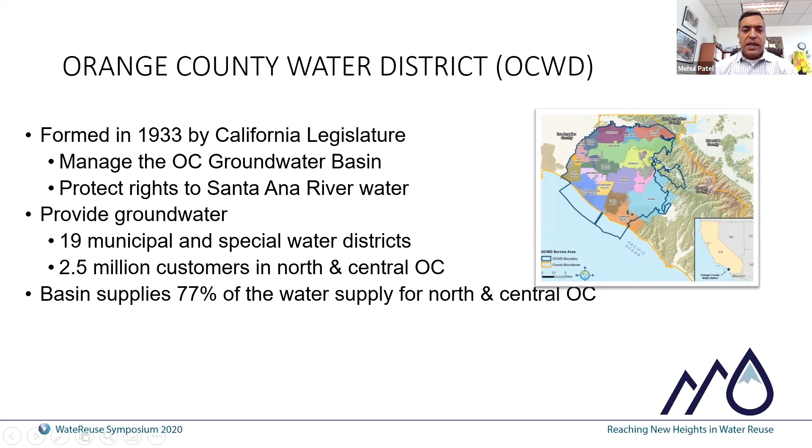So the project that we formed to help address the issue of water sustainability in our groundwater basin was the groundwater replenishment system. Some of you may already be familiar with it, but here's a few facts about our system. It's currently designed to produce 100 million gallons per day of product water. The goal is to purify sewer water, or what's better known as secondary effluent, that's produced by another agency, Orange County Sanitation District.

We use that water to sustain and help replenish the groundwater basin, as well as protect it from seawater intrusion. That's done by taking secondary effluent and putting it through an advanced water purification process that leads to a water quality that's beyond drinking water quality, with the goal of meeting or exceeding drinking water quality standards, both for the state of California and federal standards. At the current 100 million gallon per day capacity, that's enough production to produce 103,000 acre feet a year.

With the water usage rates in our service area, that's enough water for about 850,000 people. When we went into the early planning for this project, we had hoped that if the need arose, we would have the ability to expand the facility's production capability depending upon water usage rates and drought conditions in our service area. So the original project went online in January 2008 at 70 million gallons per day.

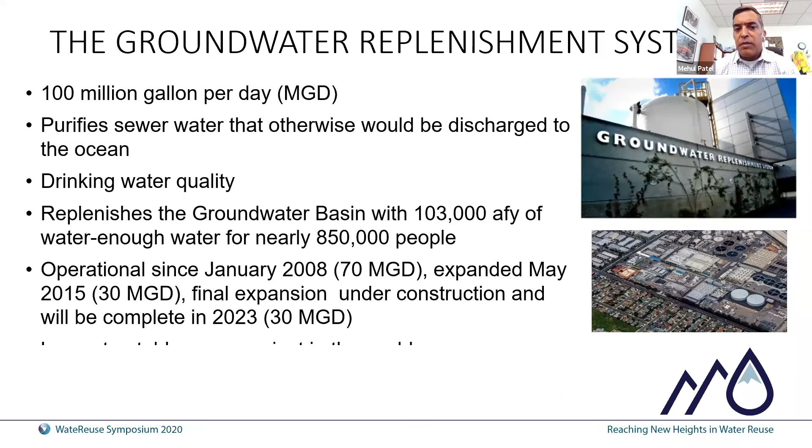At the current 100 million gallons per day, it's the largest indirect potable reuse facility of its kind. In getting to that current status, there were a lot of obstacles and considerations that got us to where we are today, and that'll be the focus of the remainder of my presentation.

One of the things we had to do before we considered even embarking on a project like the groundwater replenishment system was evaluate where our current sources of water were coming from. These are sources that we would consider for use in replenishing our groundwater aquifer, which, as I mentioned before, is our job to maintain so that 2.5 million people can get the majority of their drinking water from it. So we thought about conservation, which we still preach and practice today, but that's essential—it wouldn't be enough to cover what we foresaw for future water needs in our service area.

Of course, we've always used imported water as a portion of the sources for replenishing the aquifer. Typically, we use untreated Colorado River water or state project water through the Metropolitan Water District. But those sources are also subject to drought conditions where they're not available or less available in certain years, and their cost goes up with drought conditions and other issues. So they can't be relied upon as the sole means to meet some of these additional water needs.

We've also thought about seawater desalination, but that's very costly given the salt concentrations and energy requirements. And as many people know in California, environmental permitting for seawater desalination facilities is very difficult. So that's what led us to recycled water being the best choice, and I'll give you some context on why that is.

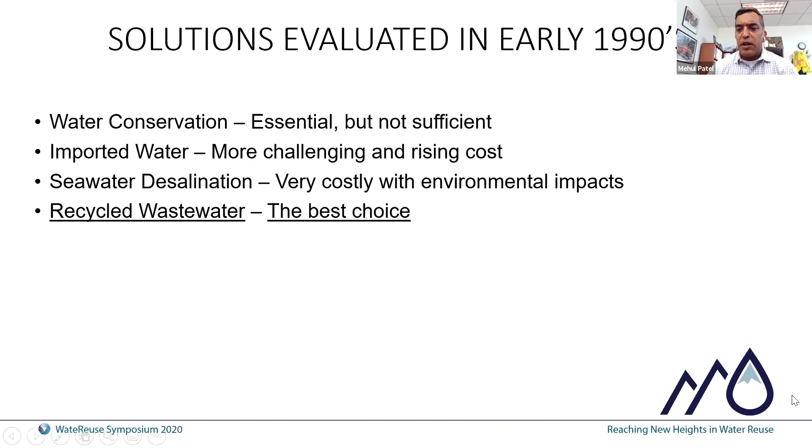As we talked about the different water supplies we evaluated, we thought about whether we could also look into full service imported water—taking water that's fully treated and trying to augment the groundwater supplies that way, or having that water available to some of our producers who use our groundwater. Seawater desalination was also considered, but quickly ruled out.

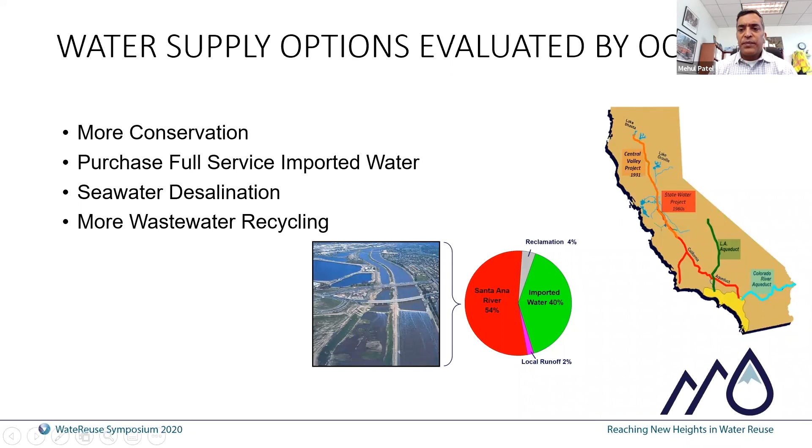So once we settled upon recycled water being the choice for us, we had to look at how we could implement a project using recycled water. We had our old Water Factory 21, which some may be familiar with. This was originally a 15 million gallon per day facility that used an advanced treatment process with high lime clarification, granular activated carbon, and reverse osmosis for salinity control. It operated from 1975 and operated for over 30 years.

We knew that technology was improving upon what was used in Water Factory 21. We knew, based upon pilot testing, that we could produce water comparable to imported water, which was our goal if we recycled secondary effluent. We knew secondary effluent was locally controlled - we have control over it, and no one else is going to take it with our partnership with the sanitation district. It was always available; there's always wastewater being produced. And we knew we could produce high quality water by insisting on the highest level of treatment. Partnering with OCSD helped make the economics and the feasibility of the project successful.

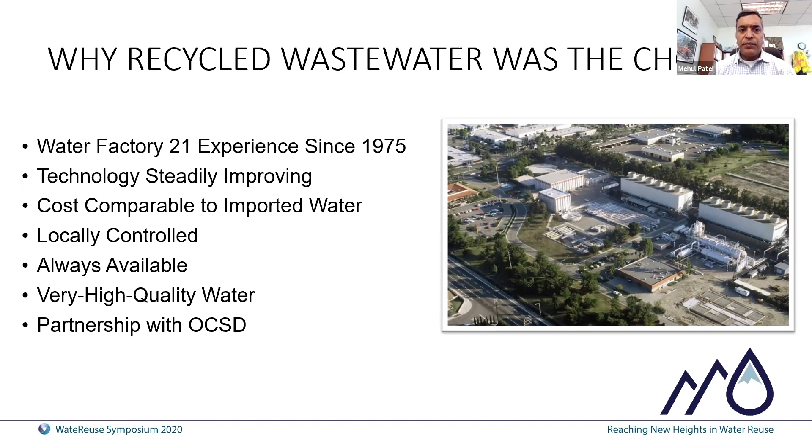So the considerations that went into what is now the groundwater replenishment system, and have allowed us to have the success we've had, is that we knew we had Water Factory 21, and we knew that at 15 million gallons per day, it was there just to feed our seawater intrusion barrier and needed to be expanded. We also knew that OCSD was having issues with peak storm flow relief, where they get inundated with storm flows in their collection system, and didn't have enough capacity in their ocean outfall and didn't want to pursue construction of a second outfall.

So they had money they could invest in our project, and we wanted to make sure that our project could be comparable with imported water. Then we wanted to figure out how it could be funded, and ultimately we used a combination of state and federal grants and state revolving fund or state low interest loans that made it feasible for us to pay for the capital of the project.

We knew that we could possibly overcome the regulatory uncertainty, because there weren't any recycled water or indirect potable reuse formal guidelines or regulations in place when we started the project and the planning for it. But we had the success of Water Factory 21 to rely upon and make suggestions to the regulators on what type of components would need to be in the project and what kind of water quality we'd need to meet.

We did extensive pilot and demonstration testing, which made us confident that we could come up with a treatment process - microfiltration, reverse osmosis, ultraviolet light with hydrogen peroxide, or advanced oxidation - to produce the highest quality water.

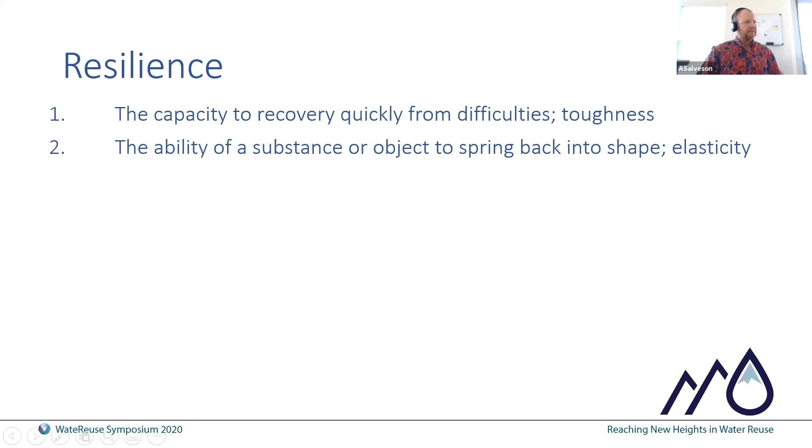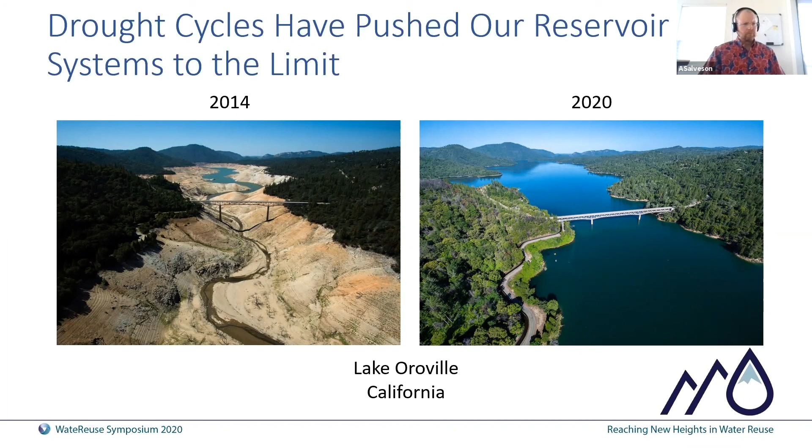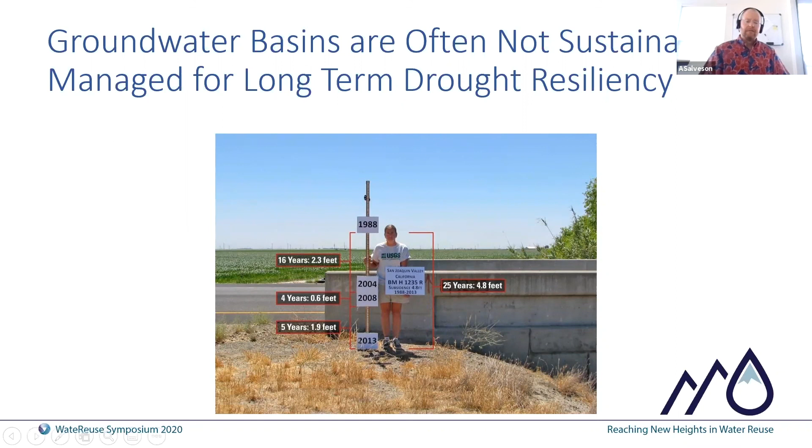So we now have the science to know how bad these droughts are. We can look at tree rings going back to the time of Charlemagne and the Viking raids on Europe, and the drought cycle we're in now is one of the 5 worst. It appears to maybe even be the 2nd worst in that 1,200-year period. And these droughts will come back, and as we see with climate change, challenges appear to be accelerating.

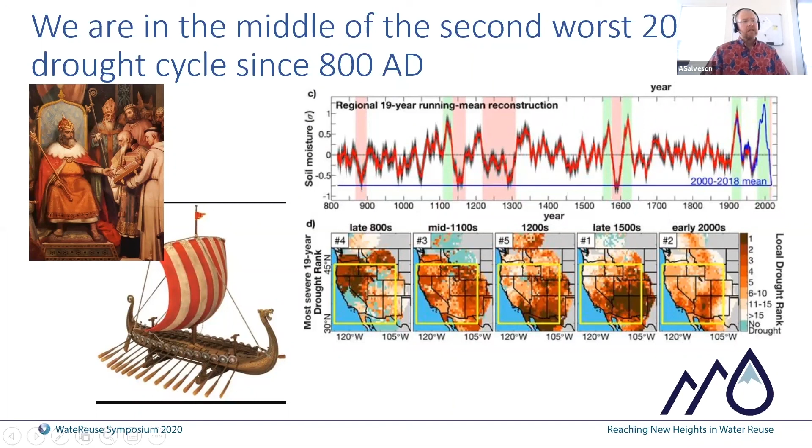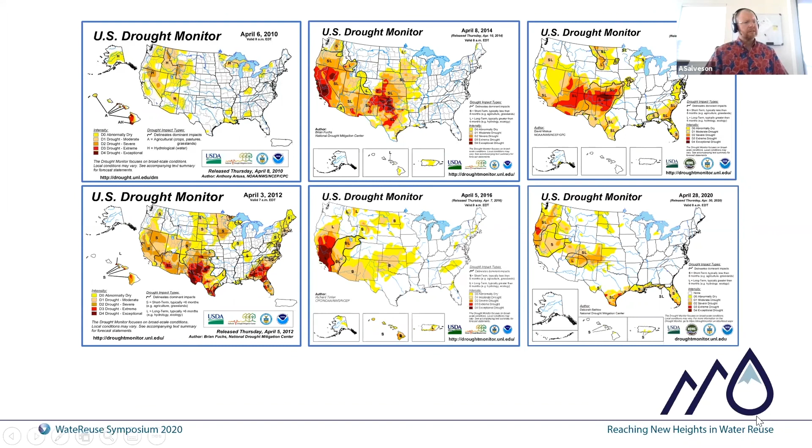We've heard this several times before in different presentations through the years at Water Reuse, and it's true: when the well is dry, we know the worth of water. But we understand the magnitude and impact of our drought cycles now. We've got data like I showed before, and a lot more of it. We now know that our water supply must function independent of Mother Nature. We can't rely upon a uniform yearly recharge of our groundwater basins or our reservoir systems.

It's not quite as famous a quote, but it really applies: a stitch in time saves 9. Again, what do we do now to prepare ourselves robustly for later?

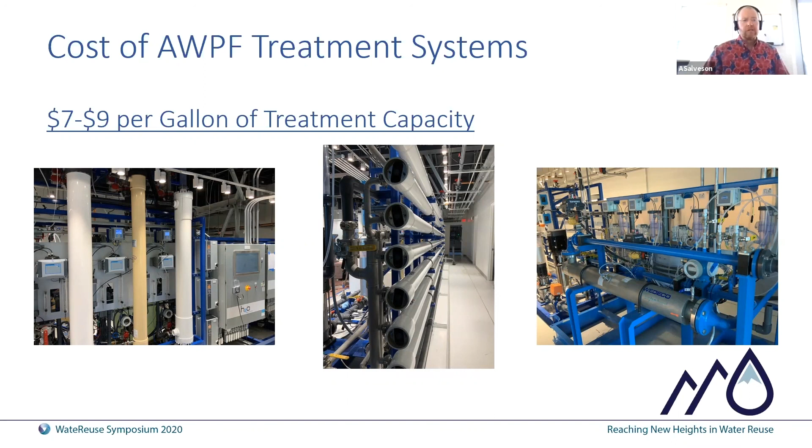Recognizing that advanced treatment is expensive, when we're talking about membrane-based, RO-based treatment as an example, building large systems that just sit idle and wait for the drought is costly — $7 to $9 per gallon. So a 10 million gallon a day facility could run you $70 to $90 million just for the treatment. There are other non-RO treatment processes, which will be discussed, that can save some costs, but it is still very expensive. So how much treatment system do you build? How much infrastructure do you build now that you don't necessarily need today?

I want to spend a few minutes on this table, so bear with me. We're looking through 4 different projects that have either been completed, are underway on the design side, or are being planned. This is a mixture of, at the top row, conventional raw water projects, direct potable reuse projects, and indirect potable reuse projects — different ways to build that infrastructure ahead of when it's needed.

So I'll go down to the second row, first column on the left. Project number 1 is a conventional raw water project where it takes a new raw water supply and builds a water treatment plant. This project is constructed as a large, very expensive facility, and the goal is an entirely redundant water supply for their community in the event of some catastrophic event. The system's run at 10% — you can't just mothball it entirely — and it provides standby for loss of the primary water supply for a community.

There we go, project number 2. This project has been planned, much like project number 1. It's smaller, so the investment is $75 million, because the community is smaller. All four of these projects are in different states across the Western US.

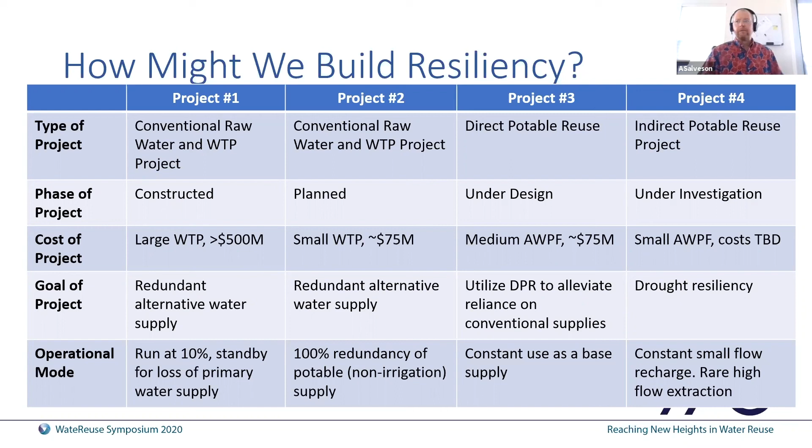This is my last slide. A few closing comments to think about and stimulate discussion: overbuilding capacity is costly, but in some cases may be necessary.

When that's done, it's nice to be able to use that equipment. Direct potable reuse is an example where you provide high capacity treatment and base flow to alleviate demands on conventional supply. Then look for ways to increase storage gradually, when the rain is falling and groundwater basins aren't being taxed too much—fill them up slowly, then allow for high use during extreme drought conditions later. IPR is a way to do this: small flow now, big extraction later.

And I think that wraps it up.

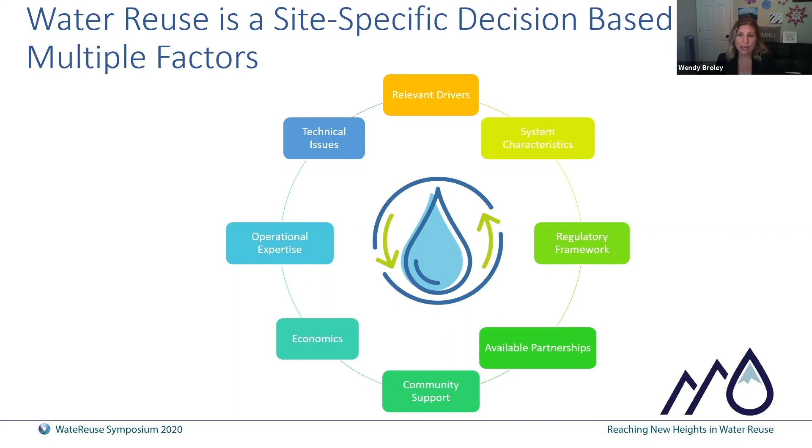So funding and community support, two really important keys to a successful reuse project. Brown and Caldwell is working with a small agency, Soquel Creek Water District, who serves about 40,000 residents. They've got groundwater as a single source of supply in their area, and they've been dealing with seawater intrusion, which has an impact on the water quality of their supply. Now, this is a community that conserves like crazy - they've done an incredible job at water use efficiency and conservation, but they found they need to diversify their supply for greater resilience and supply reliability, and they need to address these seawater intrusion issues, an additional driver of which there are many.

So the project itself is an advanced water purification facility for groundwater recharge, and it's on the order of about $100 million for conveyance and treatment. But for such a small agency with such a small rate base, that's a heavy lift for the community. So part of what's making this project a reality is their ability to bring in about $52 million in grant funding to cover conveyance and the injection wells for groundwater recharge, and then $49 million in low interest WIFIA loans through the EPA. So not only have they been able to fund their project almost entirely and reduce the impact on their community from an affordability standpoint, they've also demonstrated through a study with Stanford a huge economic benefit to the community, which adds to that community support.

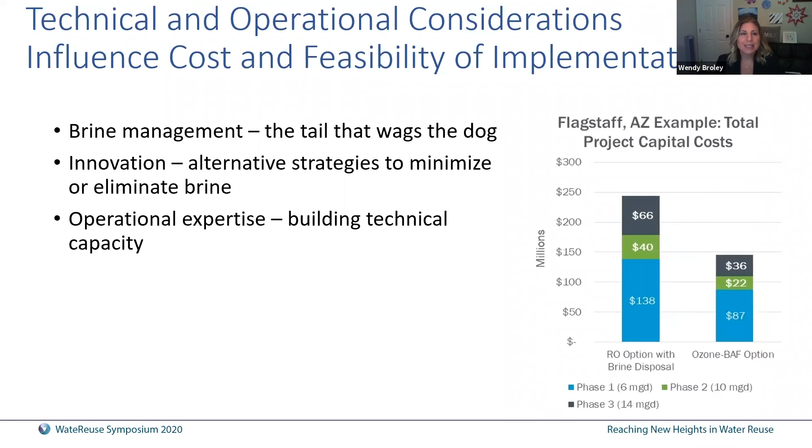If you could go to the next slide, I'd like to end just with a little call to action.

I think when it comes to moving water reuse projects forward, I encourage everyone, all the agencies or private companies looking at this, to collaborate with willing partners. Reuse isn't often something you can do as a single agency or company.

Evaluate cost-effective treatment strategies, innovate to do more with less or achieve what traditional technologies can't, and regulate. We encourage regulation of potable reuse, whether advanced direct potable reuse like in California and elsewhere, or even if you're in a state where potable reuse isn't codified yet, we recommend encouraging that too. We also want to push for more carbon-based strategies to enable more flexible reuse options moving forward.

Hand it back to you, Patrick.

Excellent, thanks Wendy, that was fantastic. I have a couple follow-up questions for you, but we'll save that for the end. Just a point to the audience - the joy of a virtual session. Just a reminder, this is a recorded session, and we certainly look forward to doing this live again in the future.

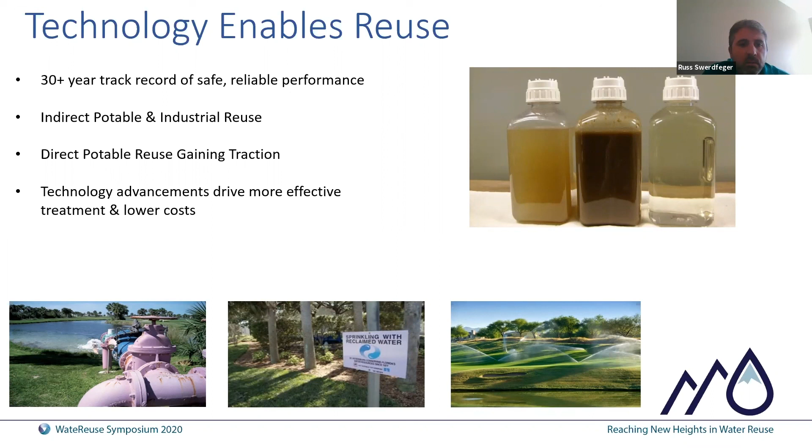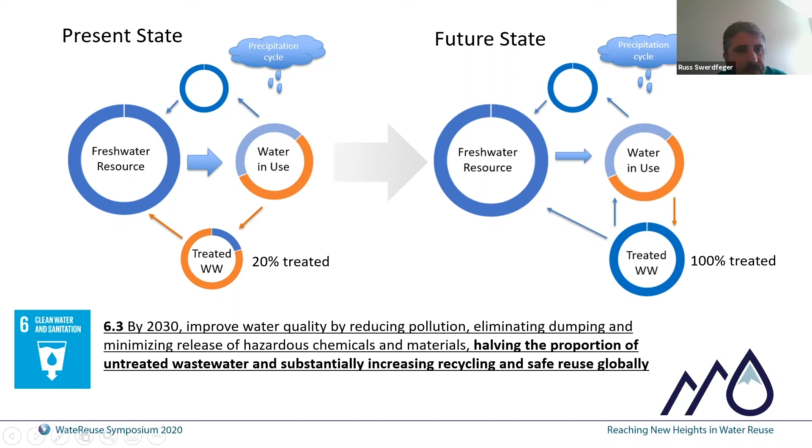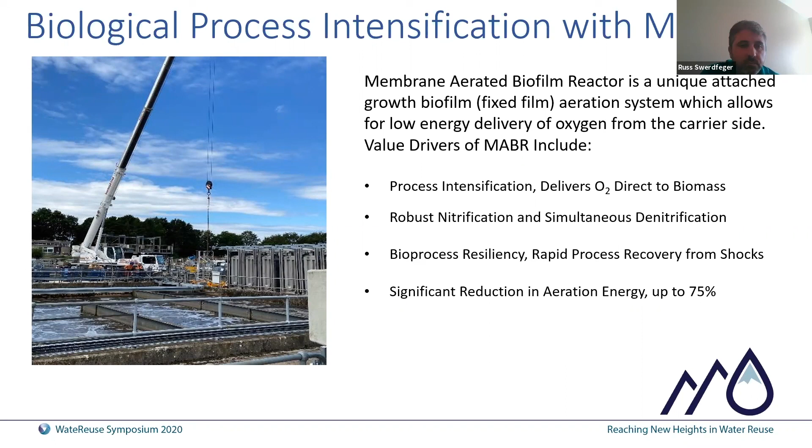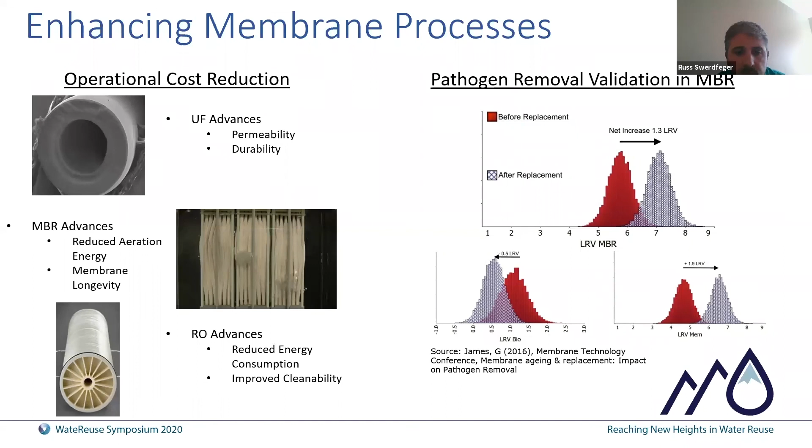And I know Zakir is going to talk in more detail about it, but we're significantly enhancing these membrane processes, especially when it comes to pathogen removal in MBR for reuse. We're taking those principles from drinking water filtration and adapting them into the area of reuse, so we can gain more confidence of the broader public, have real tangible data to show, yes, this is a very, very safe approach to ensuring confidence in our water supplies.

Now, how can we apply these technologies to enable reuse cost effectively? I think you heard Wendy start talking about this.

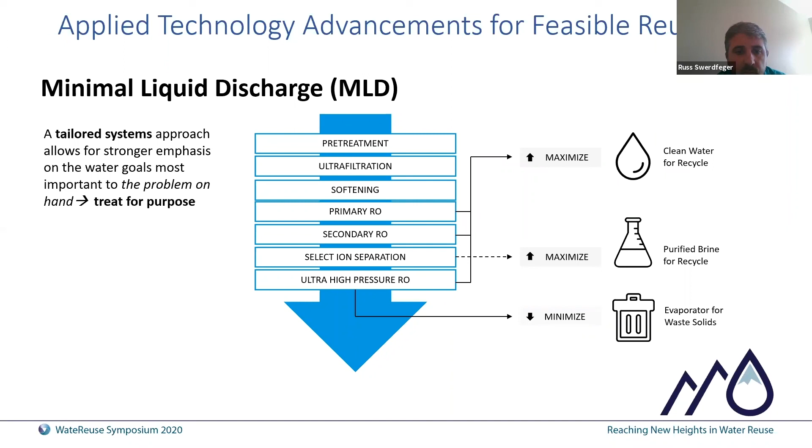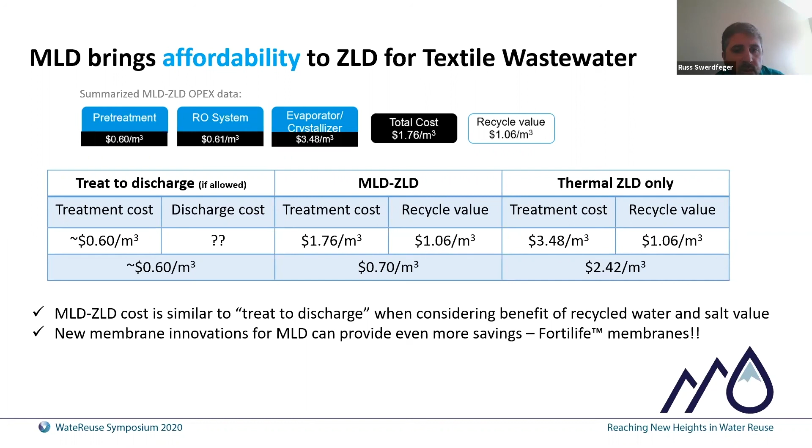When you compare it to thermal zero liquid discharge only, you can really see that cost benefit. This is one way where taking these new technology advancements and working collaboratively, as we've heard from previous speakers, can help us adapt these technologies into new approaches for solving some of these water scarcity problems.

And with that, I want to close. Patrick, thank you for you and WateReuse for giving me the opportunity to talk. And from a technology supply perspective, we're here to be part of the team going forward, looking forward to continuing this discussion.

Great, Russ. Thanks for joining, and apologies again for messing up your MBA—but I think maybe MBR. I just kind of naturally had that in my head when I was introducing you, so I think it worked regardless.

All right, so moving forward with our next panelist, we have the opportunity to have Zakir Hirani as part of our discussion. Zakir, certainly anyone that's done any water reuse projects in Southern California, especially those that are membrane-based, are very familiar with his expertise. I'll expand on that a little bit. He is Stantec's water reuse practice leader for North America. He has process design expertise in wastewater and advanced water treatment for reuse applications with emphasis on MF, UF, MBR, and RO processes.

Some of his advanced water treatment projects include the City of San Diego's advanced water treatment facility at the North City Water Reclamation Plant, Metropolitan Water District of Southern California's advanced water treatment facilities at the Joint Water Pollution Control Plant, and City of Los Angeles' AWT facilities at the Hyperion Water Reclamation Plant. He has authored over 70 papers and publications in national and international conferences and peer-reviewed journals.

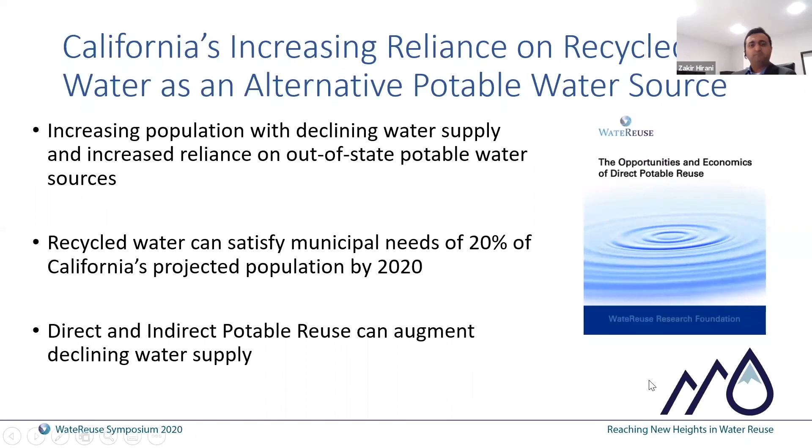From the wastewater side - next slide, please - we're anticipating more stringent nutrient regulations for existing wastewater treatment plants. Some of the largest plants in the state right now produce either advanced primary or non-nitrified secondary effluent, and these plants may be required to meet either ammonia or total nitrogen limits in the future.

Some of those large plants in Southern California include the Point Loma Wastewater Treatment Plant in San Diego, which produces advanced primary effluent at about 140 MGD treatment flow currently. The Joint Water Pollution Control Plant in Carson, operated by LA County Sanitation Districts, discharges about 260 MGD of non-nitrified secondary effluent to the ocean. And City of Los Angeles' Hyperion Water Reclamation Plant also produces non-nitrified secondary effluent, 262 MGD.

All of these treatment plants have very site-specific limitations, and footprint is one of the biggest concerns. When you want to go from non-nitrifying to a nitrifying effluent, or add a secondary process as in the case of Point Loma, footprint becomes a big concern because first you need to add the secondary process, and then you need to operate it at a higher SRT, which typically requires a larger bioreactor volume, unless you use a membrane-based treatment like MBR, which operates at higher mixed liquor concentration. So a lot of these facilities are moving towards implementing membrane-based options to satisfy their future limits.

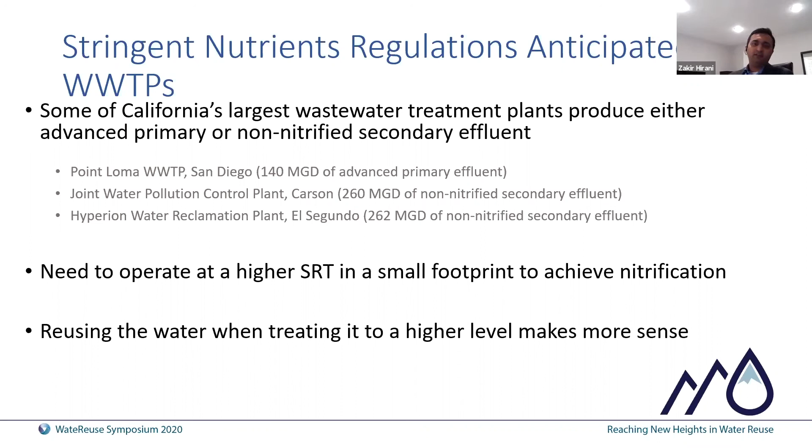I'll talk about the three planned major potable reuse projects in SoCal that Stantec is involved with, along with our partners. The first one is Metropolitan Water District's Regional Recycled Water Program, which will bring online about 150 MGD of product water using an MBR-RO-UV/AOP process train.

The second one is City of Los Angeles' Hyperion 2035 program, another large potable reuse program that will bring online about 220 MGD of product water. Finally, City of San Diego's Pure Water Program Phase 2 will bring online 53 MGD of product water; Phase 1 was about 30 MGD.

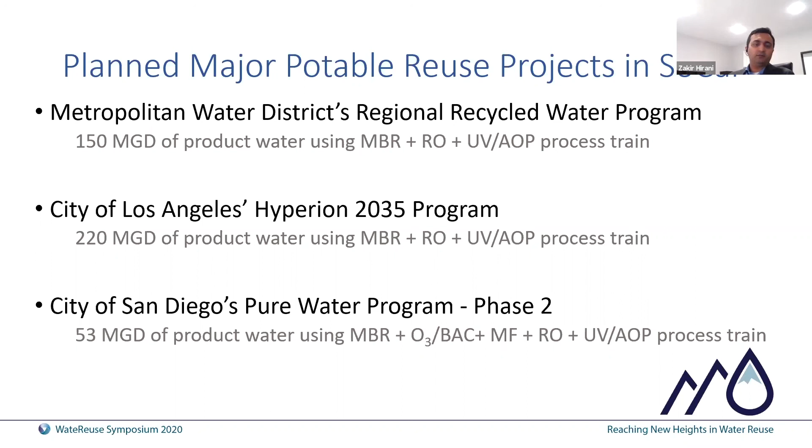So with these two phases of City of San Diego's program, Met's regional program, and City of Los Angeles' Hyperion 2035 program, when brought online there will be about 500 million gallons a day of potable reuse capacity, making our region, Southern California, a lot more self-reliant. I'm excited to be part of these projects, so let's talk about them in a little more detail. Next slide, please.

The first program is led by MWD along with its partner, Los Angeles County Sanitation Districts. The driver is on both sides: LACSD wants to eliminate nutrient discharge to the ocean as much as possible in the long run, whereas MWD would like to reuse all of that water currently going to the ocean. So there is good synergy between the two agencies.

MWD is the nation's largest wholesale water supplier. They serve about 19 million people in about 5,200 square miles of service area, and support about $1 trillion in regional economy. A very large water agency. The biggest issue they are facing is that 55% of their water is currently imported, either from Northern California or from outside the state from the Colorado River. They want to minimize that reliance and develop local sustainable water supply sources.

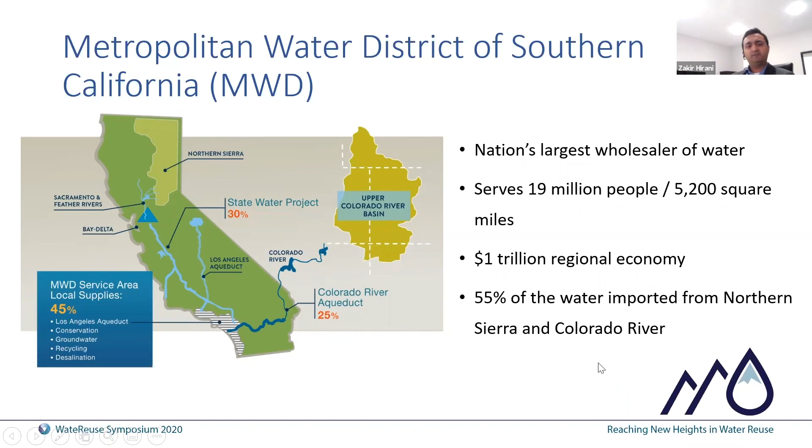Right next to it will be the full-scale advanced water treatment facility. Within that footprint, we have a small demo plant operating that will be used to obtain the permit for the full-scale facility. About 150 MGD of product water will be produced from this project, which will be used to recharge four different groundwater basins within LA and Orange County.

The best part about this project, at least for me, is that it's going to be the first in the country to use an MBR-based potable reuse train, doing so at demonstration scale and eventually at full scale. It's a very exciting project for the region as well as for the industry in general, because it's going to set the trends for a new full advanced treatment train that could be reused at several sites.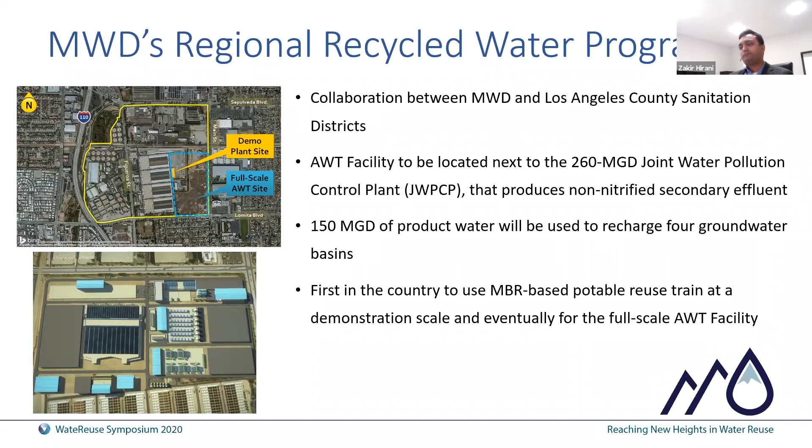The next big program is being led by the City of Los Angeles, Bureau of Sanitation. The City of Los Angeles serves about 4 million people, and Bureau of Sanitation is a sort of sister agency of LA County Sanitation Districts. Together they serve about 9 to 10 million people. The average system flow that City of Los Angeles sees is about 300 MGD, and for LA County Sanitation Districts it's about 400 MGD.

Hyperion Water Reclamation Plant is one of their four wastewater treatment plants, and the largest one in the region for them. It treats about 262 MGD of wastewater, and only 27% of that water is currently being reused. So the city's mayor has set a goal to recycle 100% of the wastewater by 2035, which brings the name of the program: the Hyperion 2035 program.

This project is led by the Carollo and Stantec team, and we are really excited to take this all the way through.

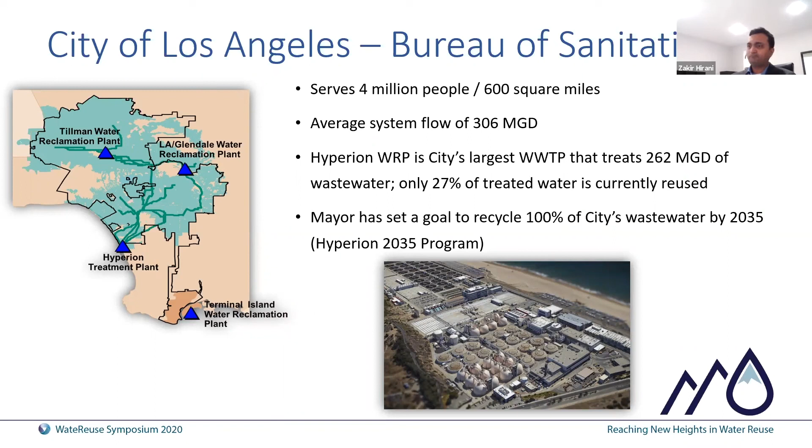There are a couple of potable reuse projects happening at Hyperion Water Reclamation Plant, and these are at different stages. The one on top that you see is a 3D model for a production facility that's 1.5 MGD, currently under design. This is something that will provide a proof of concept for the full-scale facility.

It has the same process train as the full-scale facility is anticipated to have: MBR, RO, AOP, and it's going to be brought online in the next few years. The layout I've shown has a 5 MGD capacity, but the facility is actually going to be designed and constructed for 1.5 MGD. Carollo and Stantec team are serving as owner's engineer on this, and Walsh and BNC are the design-build entity on this.

The next project down is a 3D model of a demonstration facility, the 1 MGD Hyperion MBR pilot facility. This facility is going to be a tool for the city to develop the necessary information and data required for regulatory approval of the full scale project, to get pathogen credits for MBR and overall approval of the full scale train.

This has 3 different membrane systems that will be tested in parallel: Koch, Suez, and DuPont, and we also have a common bioreactor. This facility is a joint effort within City of Los Angeles with its 2 different agencies, Bureau of Sanitation and Department of Water and Power, and also West Basin Municipal Water District. This is a very exciting project. Hopefully next year we will get to see these facilities actually built, at least the one at the bottom, so we can get it up and running.

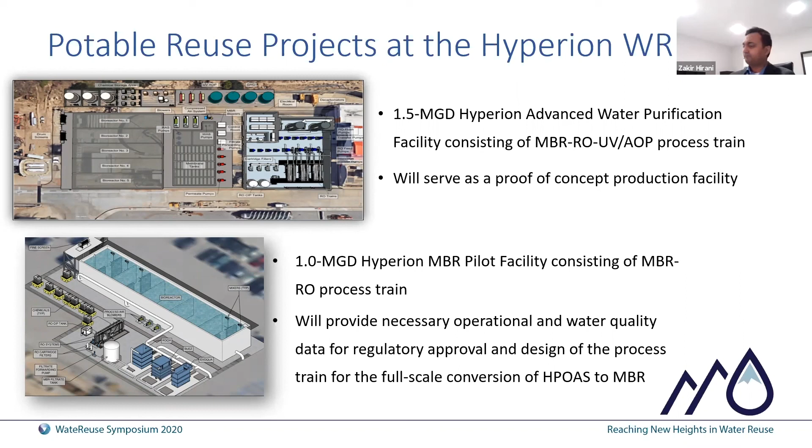The third program, one of the largest in the country, would be City of San Diego's Pure Water Program, Phase 2. City of San Diego relies heavily on outside water sources, about 90% of the water is imported. The biggest drawback for San Diego is that they don't have groundwater aquifers like Orange County has.

So they have to rely heavily on reservoirs if they want to do indirect or direct potable reuse. The Pure Water Program actually got started from concerns with the Point Loma wastewater treatment plant. Regulators are expecting Point Loma to lower its discharges to the ocean, and one of the agreements reached with the city is that they will reuse as much water as they can by diverting water away from Point Loma and building these advanced water purification facilities.

Phase 1 was already built at North City Water Reclamation Plant, that's under construction now. Phase 2 is going to be in the central area near the airport in San Diego, producing about 53 MGD of recycled water. The goal is to treat the water and get it either to Lake Murray or San Vicente Reservoir, and depending on where it goes, the regulatory requirement may be different.

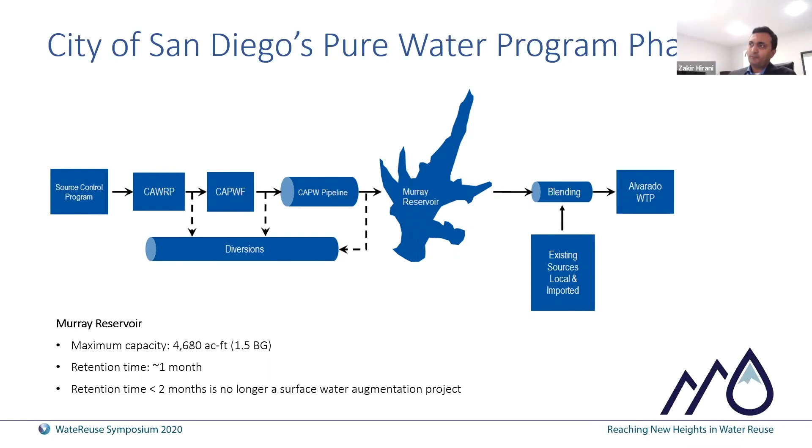With respect to the wastewater treatment plant, the goal is to really look into membrane-based treatment. This is also a very footprint constrained site, so everything is going to happen right next to the airport in a very small footprint. Current consideration is to look at primary treatment or primary clarification followed by MBR for wastewater treatment, and then ozone, BAC, MFRO, AOP process train for the pure water facility, all likely housed on the same site in a very small footprint.

The water from there is going to be pumped into Murray Reservoir, and then it's going to go to the drinking water plant and eventually to the customers.

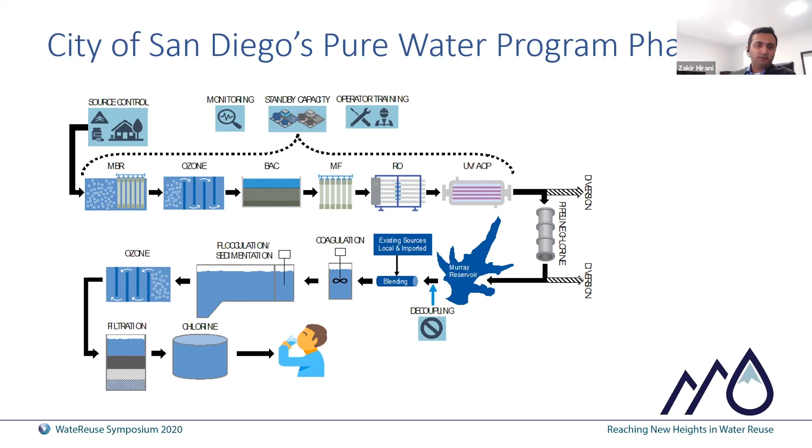All three of these large potable reuse programs are going to use, or at least consider using, MBR-based potable reuse trains. One of the biggest challenges has been for the MBR process to get pathogen credits. The current approved train in the state of California is MFRO AOP and MF, which is membrane filtration, low pressure. Either MF or UF gets log credits for pathogens, and MBRs do not. So that's our biggest challenge moving forward, and we are collecting the information and data needed to really get those credits for the MBR process. Some of that work has already started with MWD's regional program. We also want to see how the RO performs directly downstream of the MBR. That's another key challenge we want to address.

So that's all I have.

Thanks, Patrick. No, it was great, Zakir. I appreciate that.

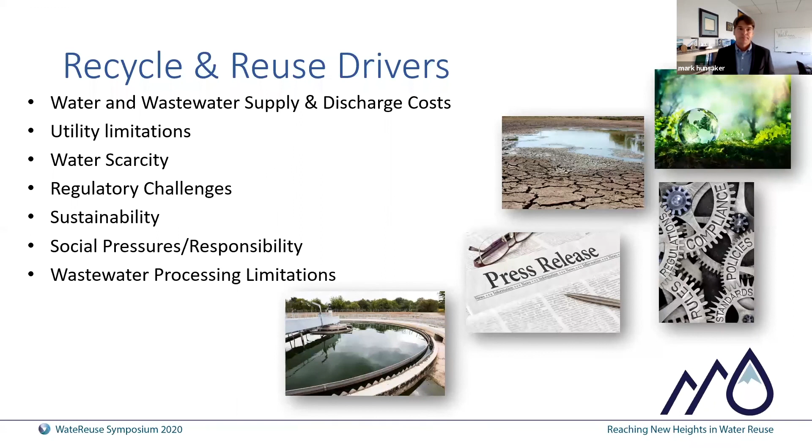So next slide, please. When we think about this, there are three basic things you need for a call to action and to really get something moving. You've got to think about those drivers we just showed on the first page—there may be several others specific to your own facility. But once you understand your drivers, and you're in a position where you have to start doing something, there are three major steps you've got to take to get going.

You've got to evaluate and really understand your water footprint. We know industrial facilities, and even municipal facilities, use water differently across the whole plant—whether it's a water treatment plant, chemical plant, power plant, or pharmaceutical manufacturer. There are different areas within the facility, and it really makes sense to do an overall water balance when looking at these things. If you don't understand where and how you're using the water, and what quality water is important for different parts of your facility, you really aren't in a good position to move forward with a water recycle reuse opportunity that benefits you and the world.

You've got to set your goals at the beginning of this—it's very important to understand that. Economics is part of the topic of our breakout session today, so you really need to understand the economics. But as the first page showed, there are drivers that aren't necessarily quantifiable in pure dollars and cents—things we want to do as industrial good citizens of the world. And if you're selling to consumers, there's a benefit in advertising and marketing as a good, green facility and company. So you set your goals, you need to understand that, set it up, and then really start moving into actions. Next slide, please.

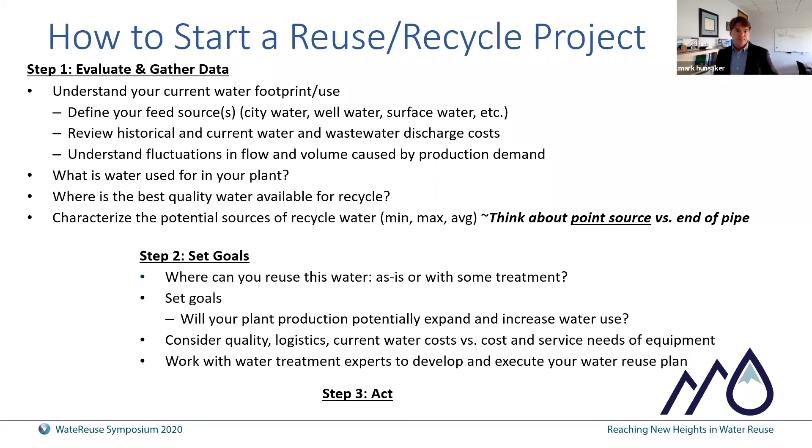When you think about this, I don't want us to forget about very basic opportunities for recycle reuse. I put this to the analogy of we probably all grew up and were taught by our folks, family members and friends to shut off the faucet when you're brushing your teeth. It seems so simple, just a couple gallons of water during that few-minute session, but it does make a difference across the world. Let's think about how can we be good citizens of water and good stewards of our earth while we're here. We should think about that.

A lot of these simple basic steps to potentially consume less potable water are really at our fingertips, and they may not be that complicated of a project. So don't forget the low-hanging fruit when you think about opportunities.

Take a step back. Most of us are in areas where there's some amount of rain per year. I know you've got drought conditions and such, but when those deluges of rain come, let's figure out ways to capture those. That water is relatively clean, and if we set up the right collection systems, it may be very easy water to just put into your feed makeup tanks with minimal treatment to reuse. Again, a little bit of that analogy back to leaving that faucet on - maybe it doesn't feel like it's that much water, but it's the first step a facility can take to start getting into that recycle reuse type mentality.

Other lightly used waters - you may have process rinse waters, maybe during one of the last steps of your manufacturing where you're doing a wash down or rinse. That water coming off of that rinse process may be very lightly contaminated. It's very important to go back and understand the water balance of your entire facility to really make a difference and find these low-hanging fruit that are lightly used waters.

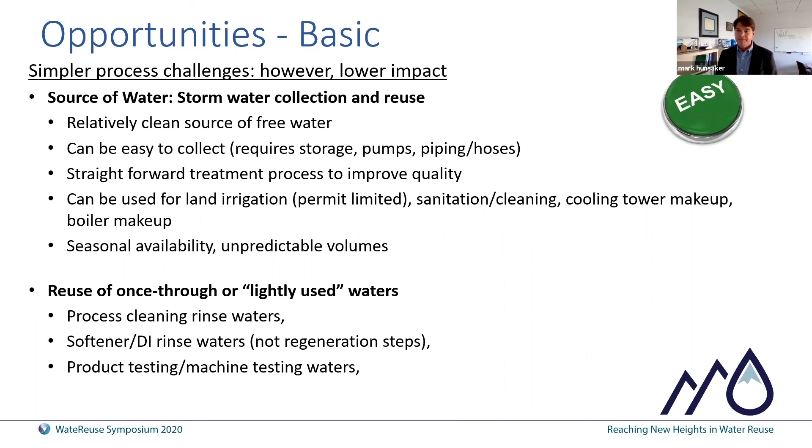Next slide. The next one, we really start getting into complex applications. These are waters that are more highly polluted, highly contaminated during your process. You may look at your wastewater overall effluent, or you may look at wastewater within specific point sources.

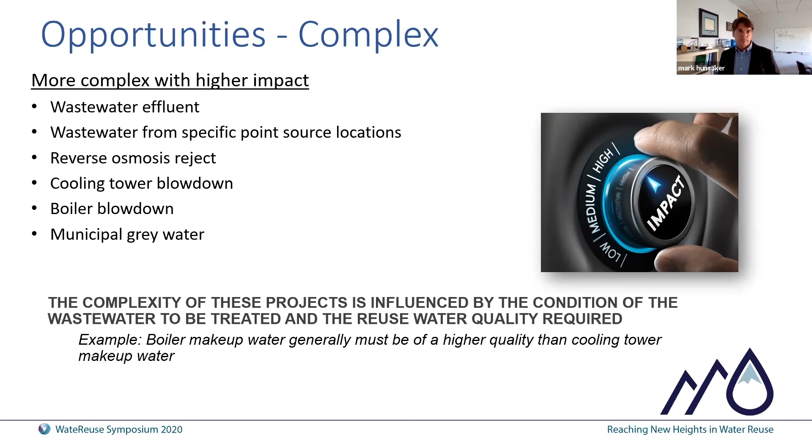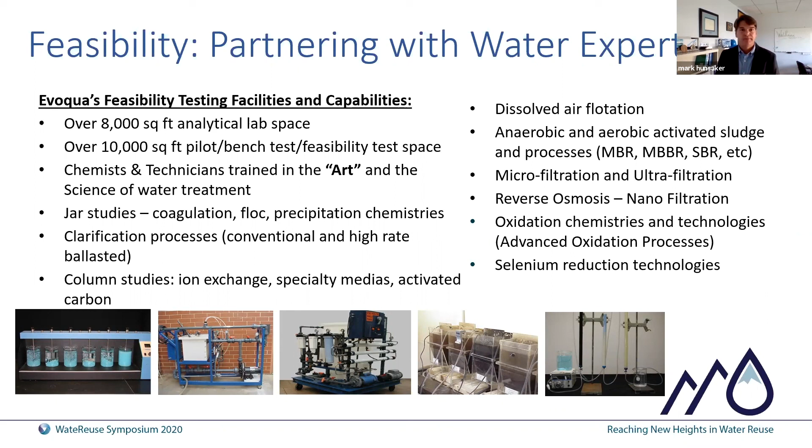Excellent, Mark, well done. And I even like that little note you wrote on the whiteboard behind you there. Well done. We'll bring the rest of the panel back on the screen here. I think we're all, to some degree, getting tired of this virtual world, but it is what it is. We certainly look forward to doing this in person again soon, specifically next spring in Tampa.